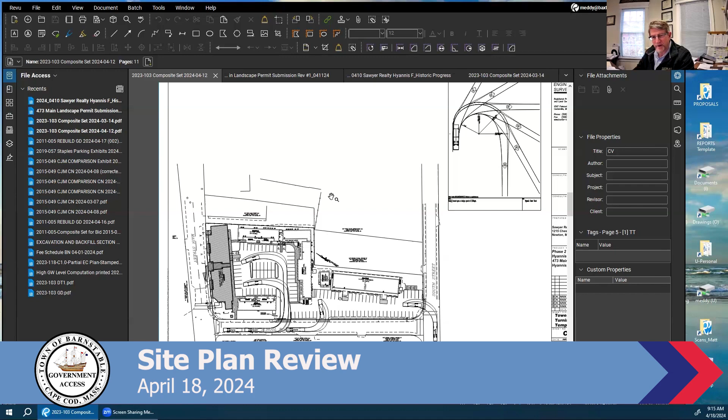We had several discussions with Captain Landman on the tower truck access into the site, and working with the captain we made some modifications, which you may recall we discussed at informal. We modified the radius here, dropping a parking space and providing the tower access as shown on this plan. I believe Captain Landman found that acceptable and it gave them the proper access they needed.

As to drainage and grading, we're providing a new stormwater management system in the center of the parking lot that picks up this entire phase 2 redevelopment, controlling storms through the 100-year storm. We've had a fair amount of dialogue with Matt over at DPW and responded to his comments. I believe we've addressed all of them satisfactorily, but I'll let him speak to that. The site is meeting the DEP stormwater policy for redevelopment as well.

Utilities: we'll be maintaining the public sewer connections. There are a lot of existing utilities going on, so there will be some coordination through the construction documents as it's submitted for building permit.

I've had discussions with Matt at DPW, Hans at Water, and also Robert Duffy with plumbing. You can see how we're proposing to connect, but there are a couple of areas where we've added notes based on review with staff, as far as the final disposition of some of the existing sewer line that comes through building F. We may allow it to come through, or this aspect here may tie into the new waste line within building F and then connect out where it currently connects.

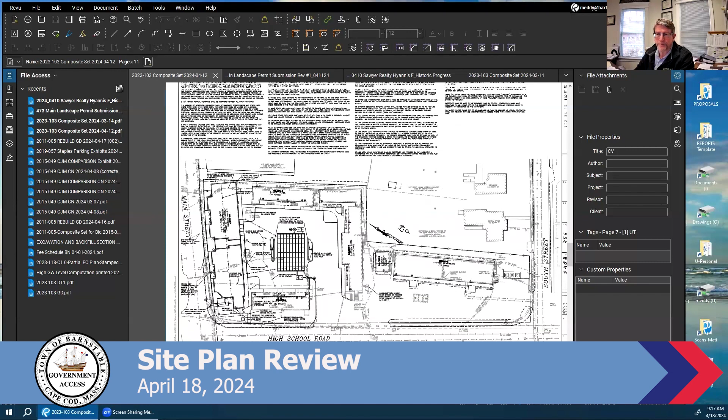Before I turn it over to Devin, I wanted to share the landscape plan. As I said, Ben wasn't here. This has been submitted to the town for site plan review. There's been this modification with the pass-through for historic considerations, and it's really enhanced - I think it's come out nice. We have this nice walkthrough here. They've added some brick areas at the entranceways per historic comments, so we really create a nice front presence on Main Street.

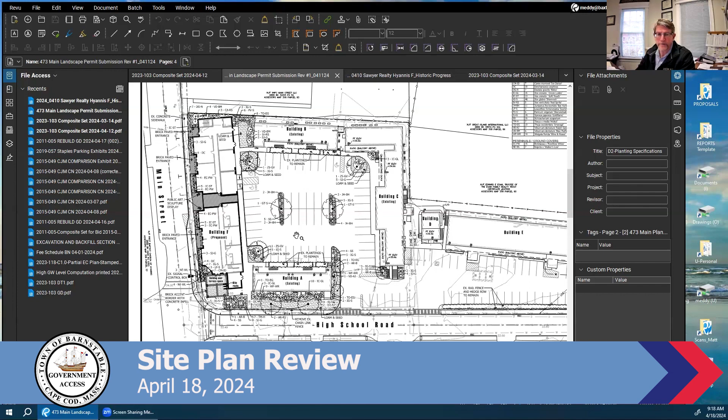So with that, I'm going to turn it over to Devin and let her touch briefly on the architectural elements. Thank you. Great, thank you.

Okay, let me share my screen now. Please.

Where is it? You want me to... Sarah's got share? Yeah Matt, can you share? It's not letting me. Sarah may need to allow you to do that. No, okay, everybody has the ability to share screen, so I'm not sure what the problem is. Okay, thank you. Can everybody see that okay? Yes, go ahead Devin. Thanks Matt.

As Matt said, the first floor is a mix of commercial and a couple units in the back. The commercial is still subject to change. We haven't married any units in there, but that's just for show. We have moved all the mechanicals from the roof down onto the first floor, which was the reason for the loss of units in the back, and now we only have the studios on the left side. We have the walkway from Main Street to the parking lot, which will be locked for the main part, and you'll have to fob entry in and out. It is a nice feature that was brought up in historic, one of the many changes that were made.

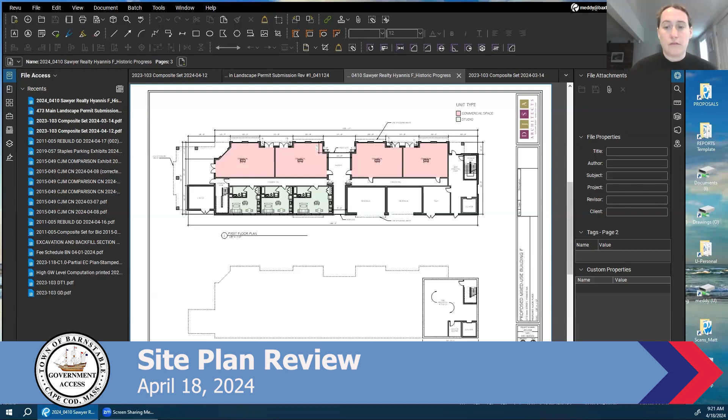And then the elevations. Oh, I do have the ability to share my screen, Matt. I don't know if you'd like me to. Sorry, I was muted. Yeah, there you go. Yes. All right, everybody see that? Yes, okay, great.

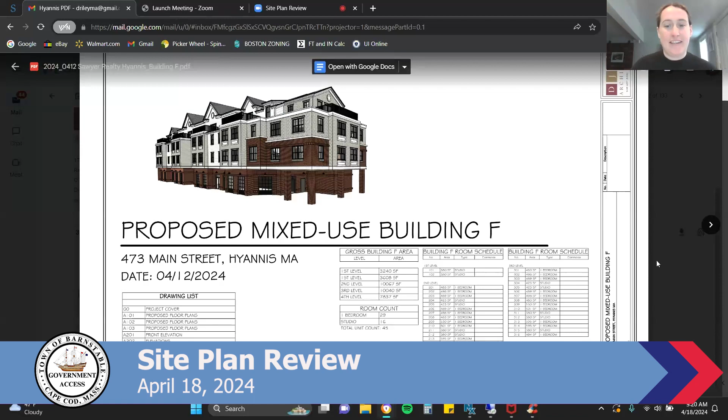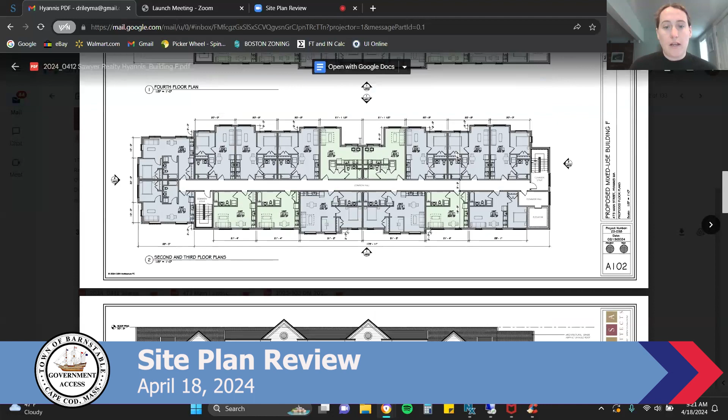So we already went through this. I added in the landscape architect's brick at the entryways, brick at the walkways, and a nice brick detail at the covered terrace. Second and third floor, fourth floor. Then, per historic comments, we changed the roof line and brought it down from 57 feet down to 50 feet, which was a nice change. That was also with putting the mechanicals on the first floor - we were able to bring that roof down 7 feet. The brick is staying on the first floor, but we are bringing it up in a few areas, and the colors have shifted from a blue and off-white to a nice classic white and an off-white shingle. This is the entryway from Main Street to the rear parking lot, and these are the different storefronts that will be the commercial spaces, and then the residential entry on the left side.

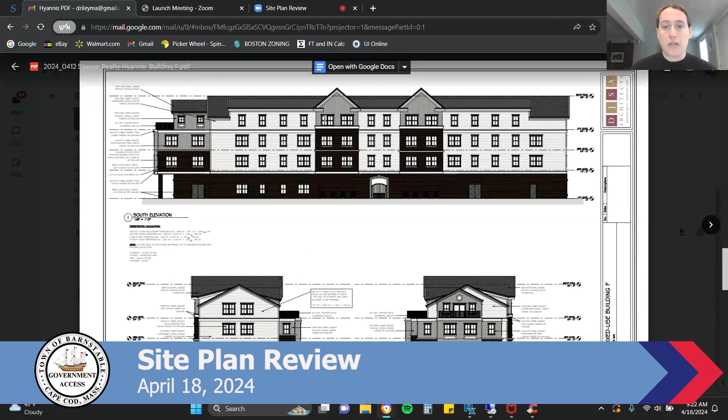Through historic comments, we also changed the rear of the building and updated the two side elevations. And that is about it. It's the nice images, landscape added to them. Looks nice. Great, thank you.

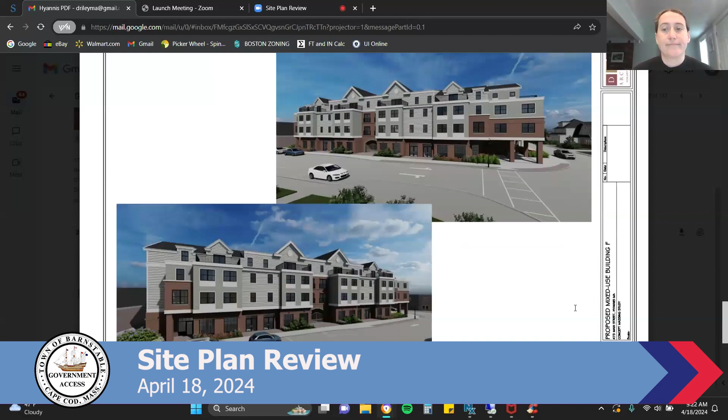Mhm. Matt or Dave, any final? You are muted, sir. I think we're ready to turn it over to staff and happy to answer any questions. I'm sorry Matt, I just wanted to say one thing - I was muted.

I'm sure Kate will bring it up, but we obviously need some zoning relief, and in particular parking, and there is a plan in place for certain off-street parking that's relatively close, very walkable. I just wanted to point out the obvious, which I'm very good at.